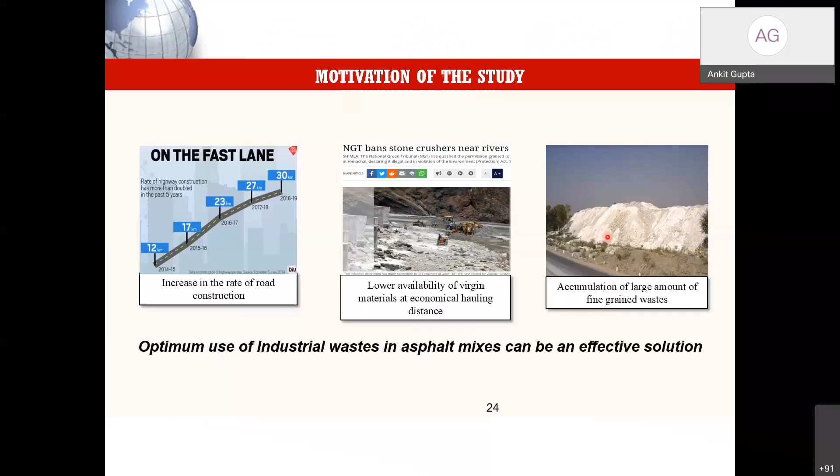To use this in the asphalt mixes. Okay, the bituminous mixes. Again, the similar problems, again coming more in the text form of a problem: India is the second largest road network, and we are increasing at a rate of 12 to 30 kilometers per day.

And a kilometer of highway construction consumes about 15,000 tons of aggregates. Obviously, some number is there, but the use of the aggregates is there. More than 95% of the road network consists of flexible pavements. Still in India, we are using more flexible pavements, probably 90 to 95%. So that's why we are focusing more on the flexible pavements.

Good quality aggregates are again a big issue and becoming a bigger issue day by day. And wherever the quarries are, if they are in a working stage, then they are deteriorating the natural environment of the areas around the quarries and even the human health of the persons who are working there. So we need to use these kinds of alternative materials.

Now, if you see the other side of the coin, the amount of waste which we are generating, the industrial waste which is coming out as solid waste, is approximately 960 million tons. So again, the disposal of this waste becomes a bigger issue. And we are only able to recycle 15 to 20%. Still, we do not have recent data for all these things.

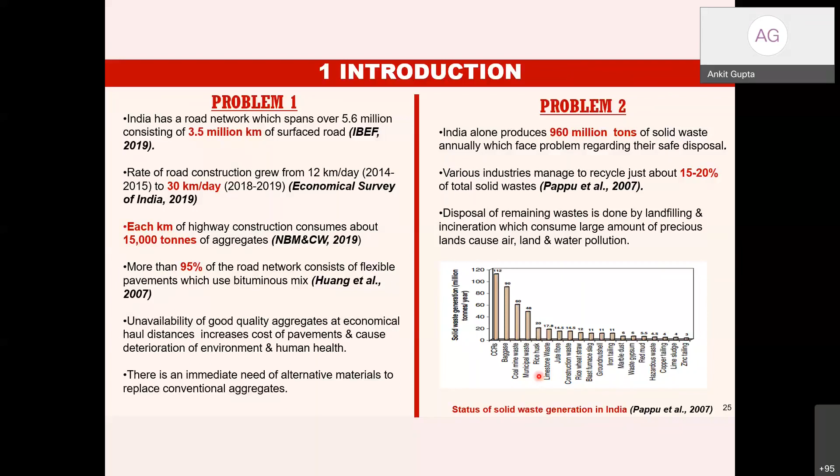If we are not getting this part, then no agency will use all these wastes in construction. And it has been found that many of these waste materials are improving the qualities and improving the service life.

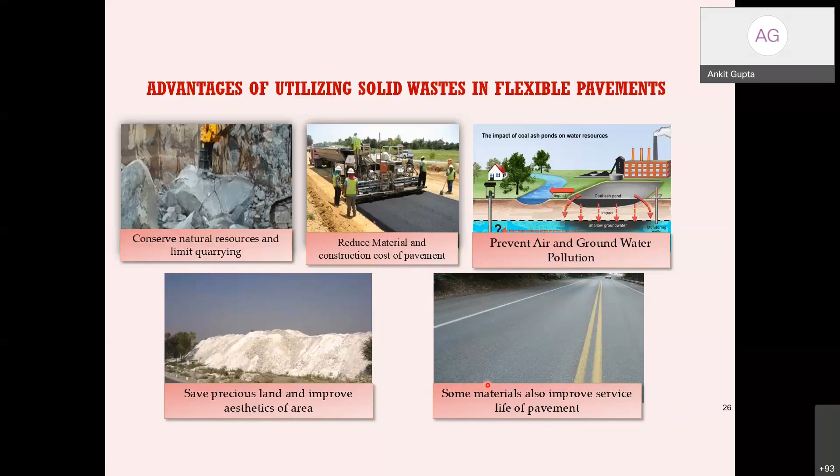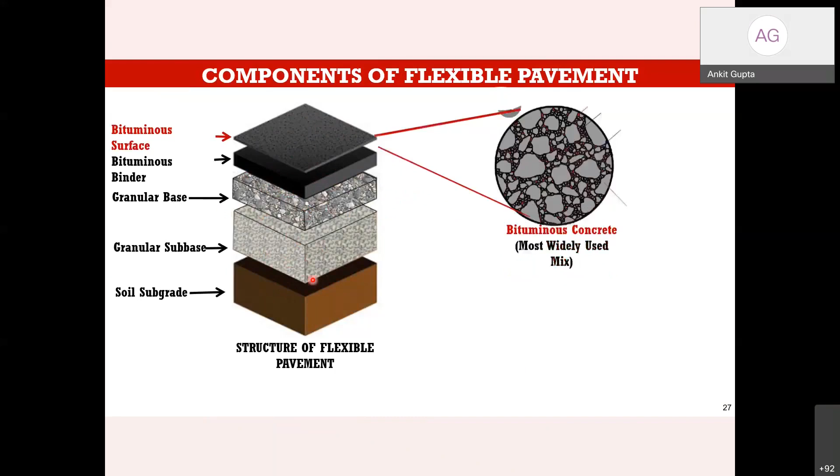Now, for a general idea of what a flexible pavement consists of: there is one bituminous surface, known as the surface course. Then one bituminous mix layer, which is known as the binder course. This is also a bituminous mix. Then a granular base layer, then a sub base layer, and the soil subgrade layer. Now we are only focusing on the bituminous surface.

So this is bituminous concrete, which is a mix of coarse aggregate, fine aggregate, and finer fillers. Finer fillers are the aggregate part which passes through the 75 micron sieve. If you talk about the European specifications, they talk about 63 micron passing. We talk about 75 micron passing. So that is the finer part of the aggregate, the third part.

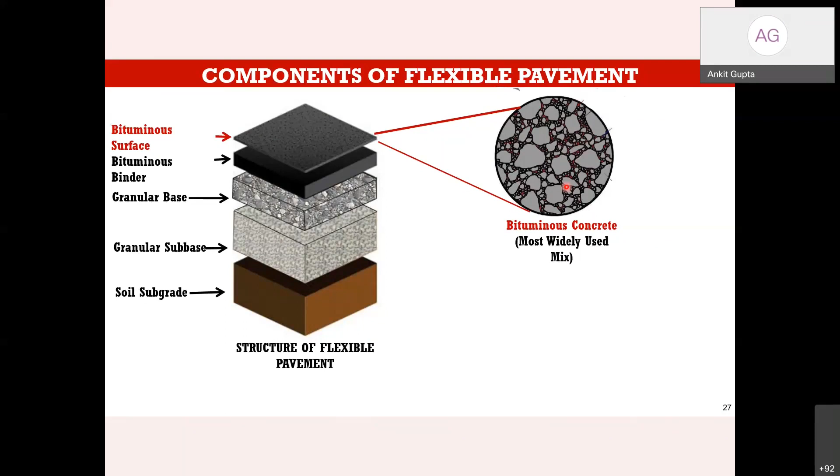And the fourth part of this bituminous concrete is the asphalt or the bitumen. So these are the four things which basically make our bituminous concrete: the coarse aggregate, fine aggregate, filler, and the bitumen. Now this filler serves two purposes.

One is that it fills the voids in the aggregate skeleton which is made by the coarse aggregate and the fine aggregate. So whatever skeleton is made by this coarse aggregate and fine aggregate, the filler fills the finer voids. The other use of the filler is that it mixes with the bitumen.

It mixes with the bitumen and it becomes a thick kind of a mastic, which is used for covering the aggregate surfaces. So the aggregate surfaces which are being covered by a black layer are not only of binder; it is basically a mix of bitumen plus filler, which is known as a bitumen mastic.

But while interacting with this bitumen, this filler should be inert in nature. There should not be any chemical interaction with the bitumen. So this is the ideology behind the use of a filler. If it is chemically interacting with the bitumen, you have to check what kind of chemical interactions are taking place. A few chemical interactions are good for the properties of the bituminous concrete. Some chemical interactions are not. We will see in the coming slides.

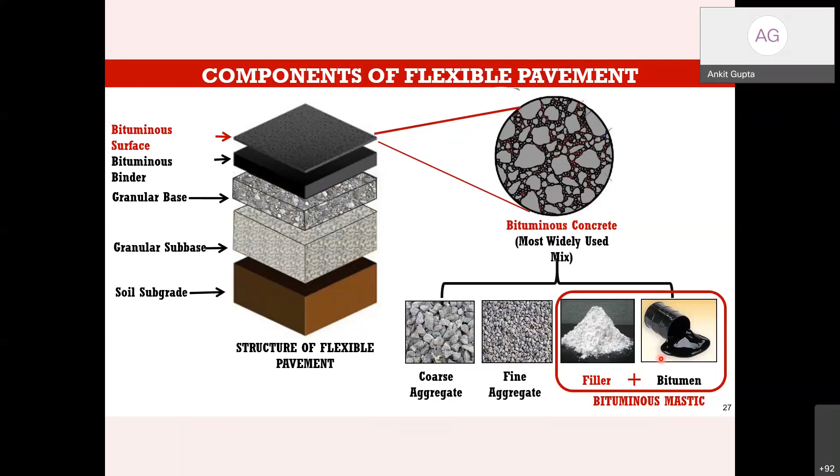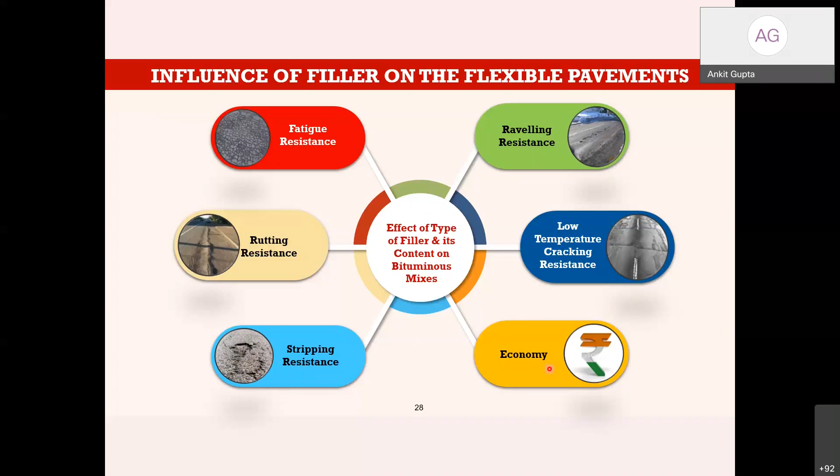Now coming to the mineral filler, those who are not aware of this area can try to understand that the fillers are the finest aggregate, passing through the 75 micron sieve. Our codal provisions, the Ministry of Road Transport and Highways provisions, say that a filler should have two properties to be used for pavement construction. The filler should be free from organic impurities and have a plasticity index not greater than 4. So the first thing is passing through 75 micron. The second thing is PI less than 4.

Obviously, these two properties are not very self-sufficient, which we have found from our research also. We have found that PI less than 4 is not a very good criterion. The filler should be free from organic impurities, but PI less than 4 probably is not a good criterion, and we have our own logic and justifications for why it is not.

But as per the Indian specifications, the filler in a whole asphalt concrete mix consists of something like 4 to 10% by weight. So that is the amount of the filler. So almost 7 to 8% of fillers, if you are directly using some waste kind of a thing, it can save a significant quantity of our economy also.

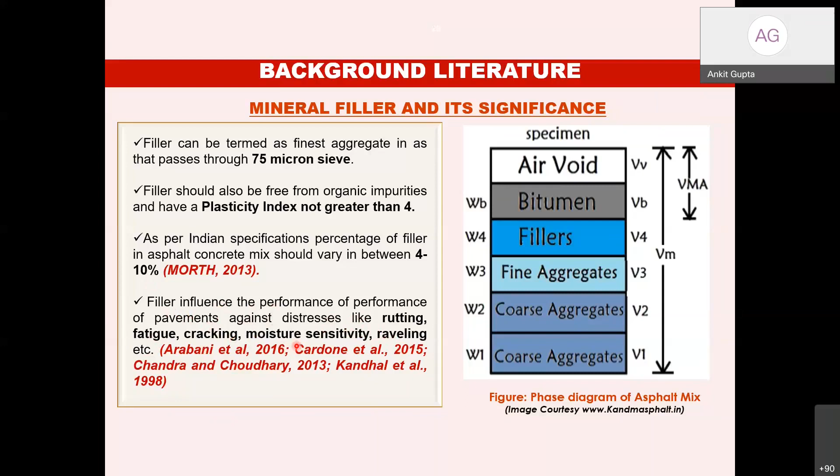Now again, as I discussed, filler has an influence on the performance of pavements against various distresses like rutting, fatigue cracking, moisture sensitivity, raveling, etc. And this has been shown by various researchers. This is only one slide for the literature review. There are so many wastes which have been worked upon in the literature; I could not quantify all in this particular slide, but there are many more.

There are coal fly ash, marble dust, granite dust, rice husk ash, which is an agricultural waste, sugarcane bagasse ash, again an agricultural waste, recycled brick dust, a construction demolition waste, sewage sludge ash, cement kiln dust, coal waste powders, ceramic waste dust, bauxite residue; all such kinds of things have been used.

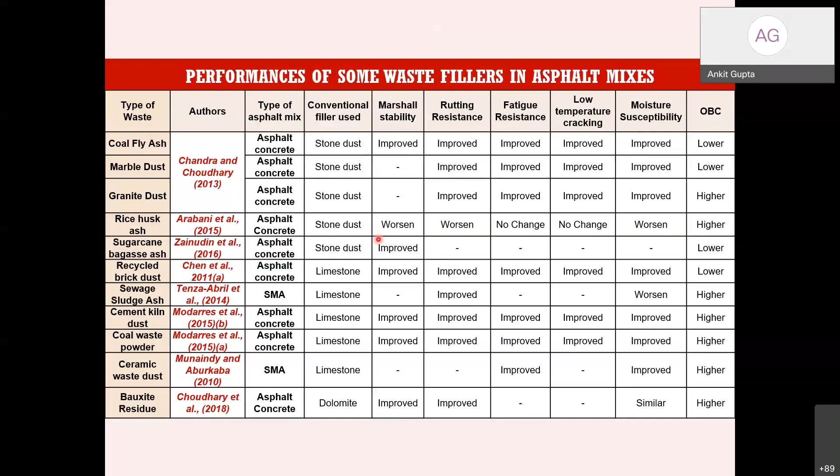And mostly you will see that the use of these waste fillers has improved the properties. Only in certain cases, at one or two places, one or two properties have reduced; it has worsened the properties. Most of the properties have increased.

So this has basically given the primary objectives to work upon: we have used glass powder, limestone dust, copper tailing dust, carbide lime, rice straw ash, red mud, and brick dust, and stone dust was the conventional filler, just to compare the properties.

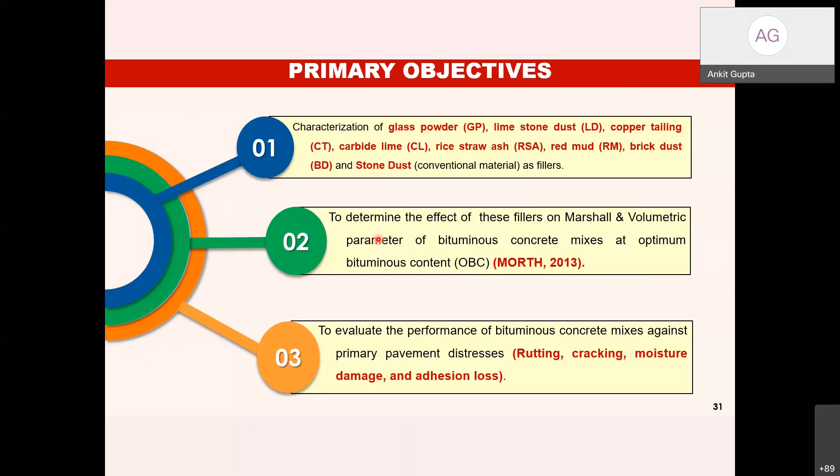Okay. And then we have made our mixes, we have tested our mixes, we have done some engineering analysis, economical analysis, and the global warming potential analysis. That is the environmental analysis we have done. Okay, so this is the methodology we have used.

Okay, the carbide lime is being collected. I'll show you all the sources in the next slide. Okay, but for a filler, we did some characterization. The characterization tests are the particle size distribution, German filler, specific gravity, methylene blue, plasticity index, the microstructural properties, that is the SEM and the XRD, pH and the hydrophilic coefficient.

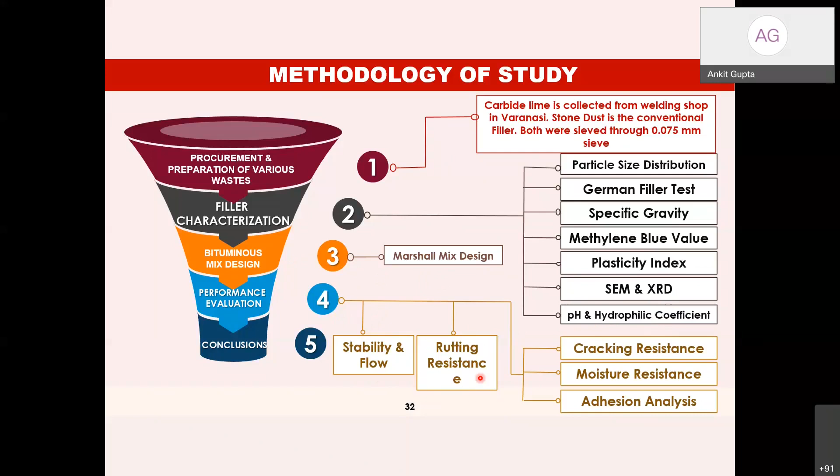Then we did the conventional Marshall mix design, we did the performance evaluation of the mixes by using some indirect tests like the rutting resistance. We used cracking resistance. We did moisture resistance. We did the active adhesion analysis, and then we did some comparative analysis.

Okay. So these are the different fillers which we have studied in our lab. Construction demolition waste we have taken from our city, Varanasi. Limestone dust we have taken from the limestone industries which are situated in the district of Kota, Rajasthan. The glass powder we have taken from Bhopal. The copper tailings from the HCL industries of Malanjkhand.

Then the carbide lime again from Varanasi, from the acetylene industry. If you have heard about the welding wires, okay, the welding industry. So this is the waste which is coming out of a welding industry, the carbide lime. The rice straw ash is the agricultural waste, again taken from Varanasi.

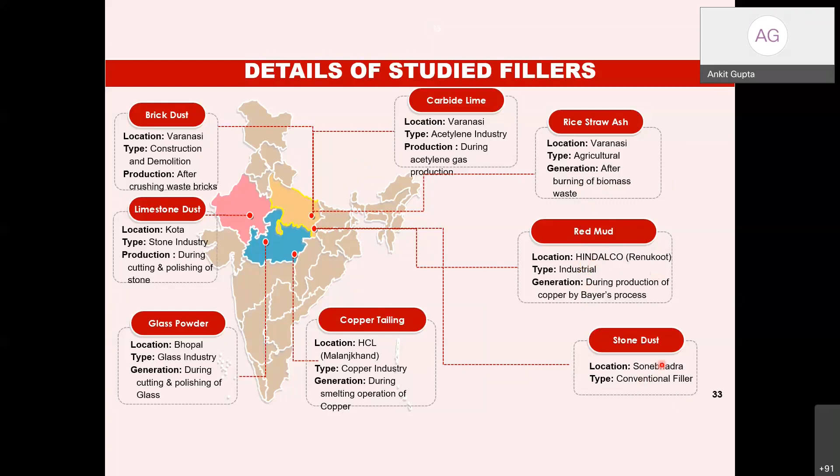The red mud we have taken from Hindalco, that is the aluminum industry near Renukoot. Okay. And the stone dust is a conventional stone dust which we have taken from a local quarry that is in the district of Sonebhadra.

Now coming to a more detailed research methodology, we have done all these characterization tests for the fillers. We did the Marshall mix design. Then we did the testing of our bituminous concrete. Okay. Now the indirect tensile strength for the fatigue cracking, the resilient modulus, the modified Lottman test for the moisture resistance.

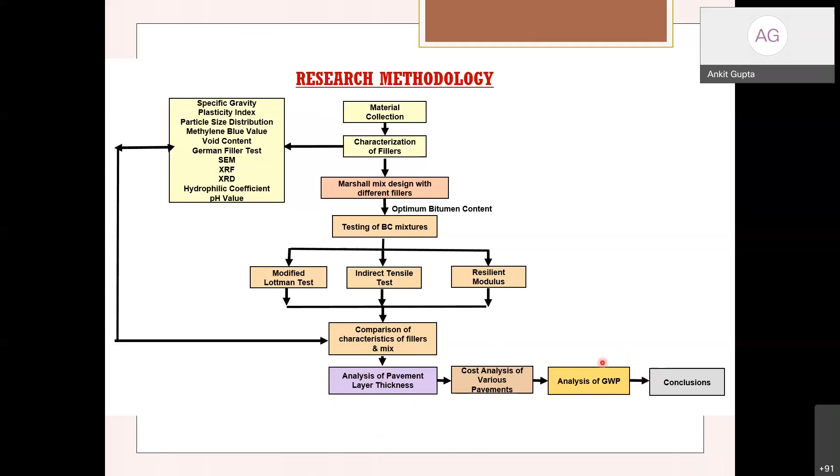And then we did the comparison of the characteristics of the fillers and the mixes for finalizing the pavement layer thickness. So we basically designed the pavement hypothetically by the values, and then we have tried to compare the cost analysis of the various pavements, and then we have tried to analyze the global warming potential also, whether it is really sustainable or not. So that's why we did some global warming potential analysis, also known as the environmental analysis, and we finally come to some conclusions.

Now coming to the first part, that is the characterization of the filler. It has been shown in the previous literature that the fillers having small size particles show some strong chemical interaction with the bitumen, and they normally have high stiffening power also. So you can see the limestone dust, the rice straw ash, and the red mud were found to be among the finest fillers, as shown in the next chart also. The fineness modulus values are the smallest, and the D50 values are also small.

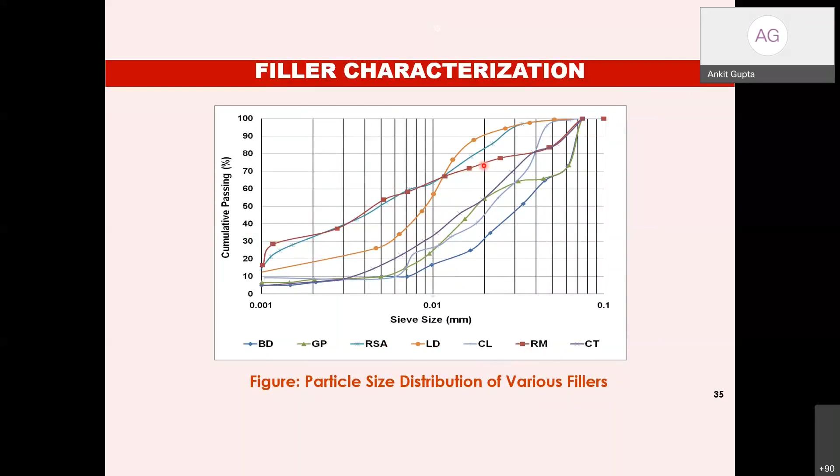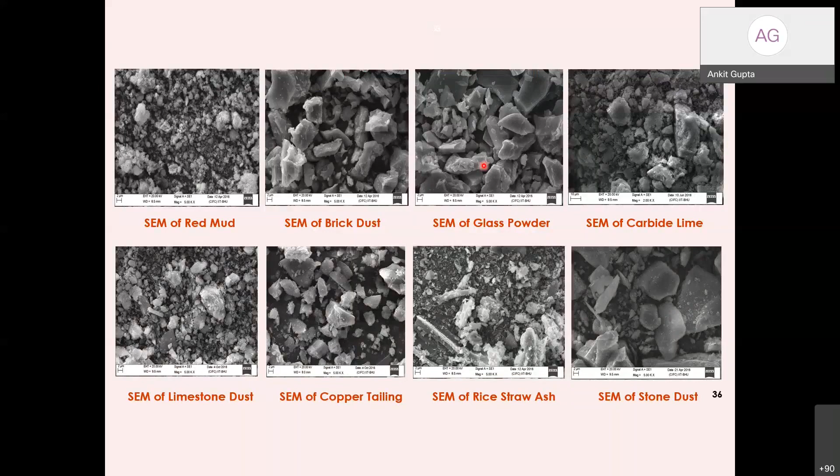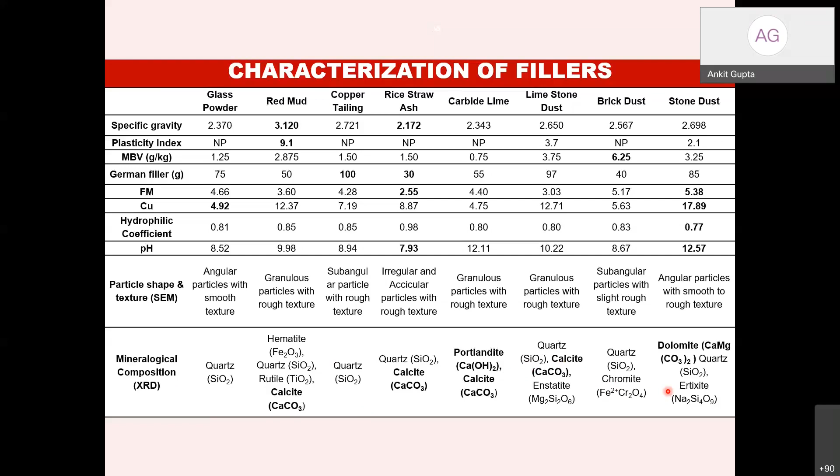Okay, so a higher amount of silica content will lead to failure in the moisture, because if silica is there on the surface of an aggregate, then the bitumen cannot have a strong bond with the silica. Okay, and there will be a repelling action, and in the presence of moisture, the bitumen loses contact with the surface of the aggregate. Okay, and that has been seen in the results also.

This is a very conventional Marshall mix design. Those who are not from the pavement side do not need to worry about it. And those who are from the pavement side must have a good idea of the Marshall mix design. So we did it as per the conventional MS-2 method, the MS-2 codal guidelines. 15 samples were prepared for bitumen content varying from 4.5 to 5 to 5.5, 6 and 6.5. The optimum bitumen content of the mix is defined as the bitumen content which corresponds to 4% air voids.

And at OBC, 3 more mix samples are prepared just to check the statistical or repeatability values for finding out the Marshall stability, flow, VMA, and VFB. We also tried to find out the apparent film thickness, that is, what is the film thickness around the aggregate, with respect to NCHRP reports 567 and 673.

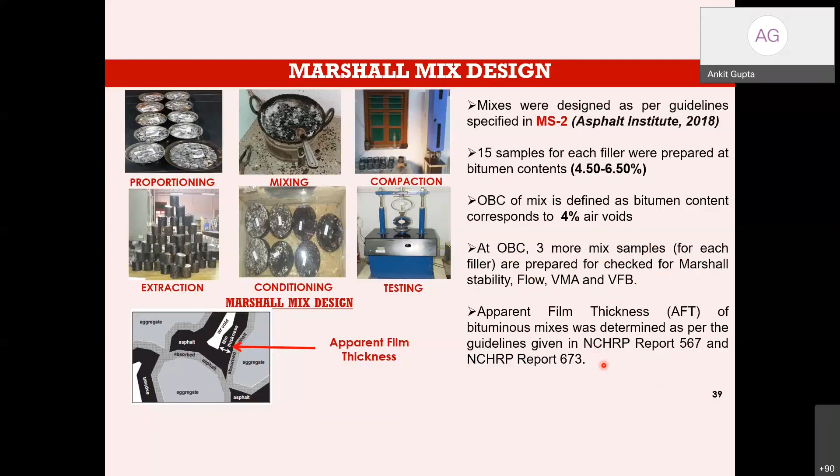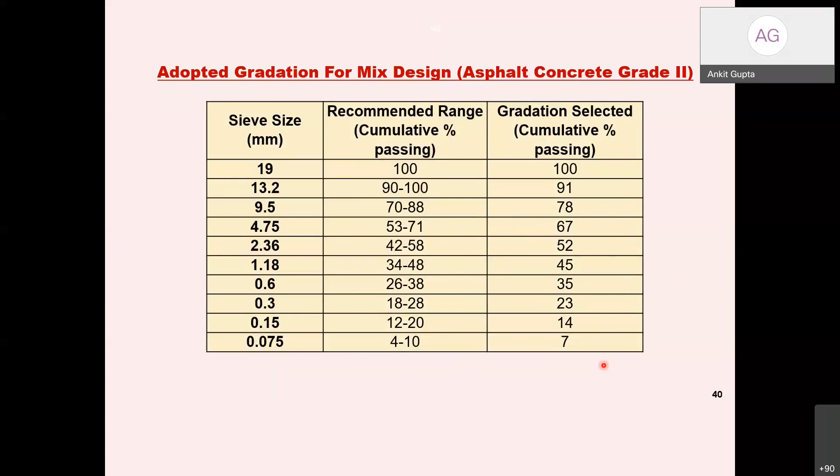This we have used for the asphalt grading, BC grading 2, which has been taken from the Ministry of Road Transport and Highways guidelines, that is the Orange Book. And these are some of the comparisons of the results for the Marshall mix design.

Now you will see that as compared to the stone dust, because this is our comparative value, the limestone dust is even using a lower amount of bitumen content. The OBC is lower than this 5.38, that is 4.98. So we are saving bitumen, and bitumen is the costliest part in our whole pavement materials. If we are saving bitumen, then obviously we will save a lot of cost. So limestone dust is only requiring 5% as compared to 5.38 for conventional stone dust.

The red mud obviously is taking a higher amount of bitumen, but if you see it on a life cycle cost method, then probably the red mud is again viable because you are utilizing the waste. So maybe right now it is a 50-50 kind of thing that we are using red mud. We are getting a somewhat higher OBC, but it can be used.

And if you see the required properties as per the guidelines, most of these fillers are passing those properties. If you see the bulk specific gravity, the values are in a good range of 2.45 or 2.47. So it's a good bulk specific gravity we are getting. The Marshall stability should be 9 minimum. We are getting values more than 9. The minimum for the

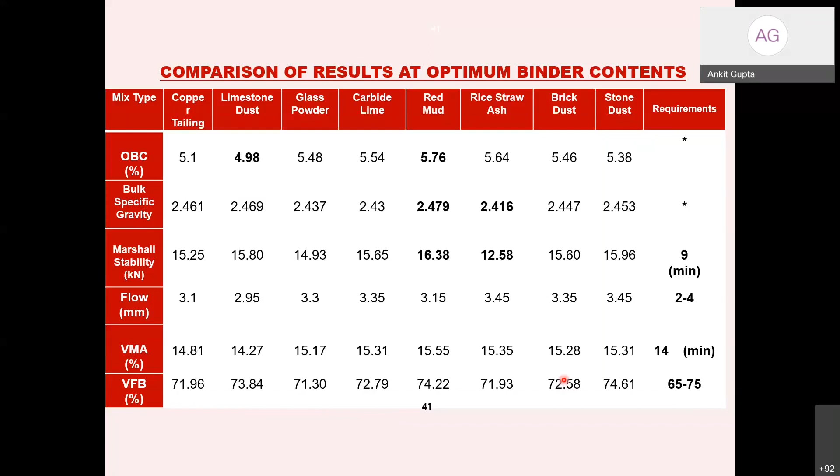This slide can conclude that we can use all these waste fillers in our pavement industry, if you just omit the plasticity index part, which should be less than 4. But for red mud, we are getting a PI value of 9. Except that part, we are doing good with respect to our guidelines. So this is all about the results of using the various wastes in our bituminous mixes.

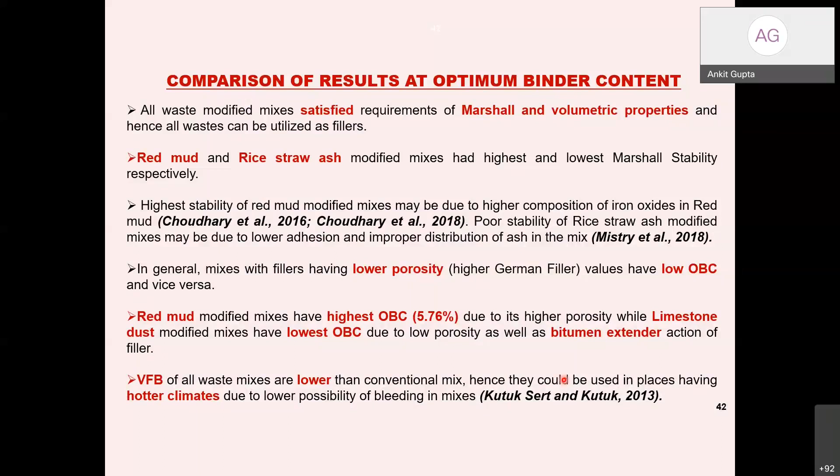My thing is not ending here. This is the comparison we have discussed right now. Now coming to the various kinds of mixes which we have tested. After making the asphalt mixes, we have tried to evaluate their performance from laboratory tests. There are two basic modes of failure of a flexible pavement: one is rutting failure, one is fatigue failure.

For rutting failure, the original method of doing the rutting test is using the Hamburg wheel rut tester, which is one of the sophisticated machines. Right now we do not have this in our lab, but soon we are going to purchase one. So we have done some indirect testing, that is the Marshall quotient, the ratio of the Marshall stability to the flow value, which has been widely done by researchers and widely accepted in the literature.

So we have done this Marshall quotient test, and we found that apart from the rice straw ash, all waste modified mixes have higher rutting resistance than the conventional mixes, which were with stone dust. Now why is the rice straw ash lower? Because it is very fine, it has a lower specific gravity, and it has higher voids in the mineral aggregate. These are the reasons the rice straw ash had a lower value.

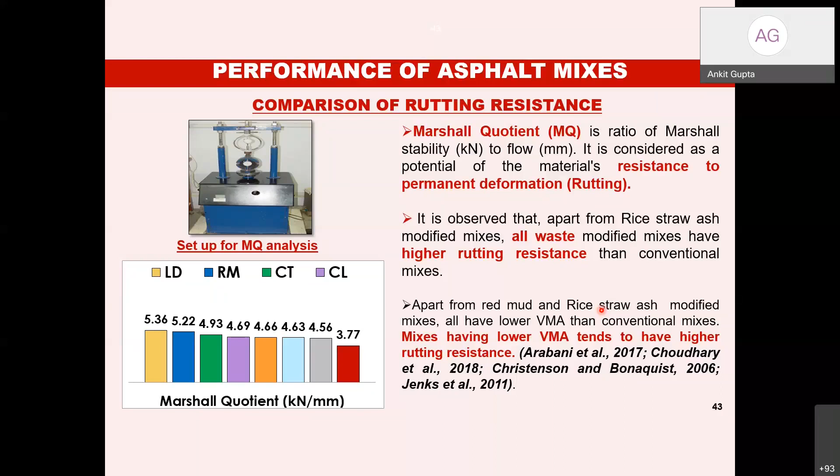Now coming to the cracking resistance part, the fatigue cracking has to be checked by the UTM, the dynamic UTM. But again, we do not have that equipment.

In a month we are expecting the delivery of the UTM in our lab. So we have done some indirect testing using indirect tensile strength, as per the ASTM codes given in the D6931 specifications.

Now you will see the results. Apart from the brick dust and the rice straw ash, all the mixes are having higher ITS values. Only for the construction demolition waste and the rice straw ash, which is showing some inferior properties as compared to the conventional stone dust.

I am still not telling that the rice straw ash modified mixes are bad. Only thing, they are not able to perform as per the conventional mixes prepared with stone dust. All fillers are finer than the stone dust, as determined from their lower fineness modulus values.

The finer fillers, as I told earlier, have a greater potential for uniform distribution, which leads to formation of a good, compact structure that improves the stiffness and ITS of the mixes. Most of the fillers are showing superior properties for cracking resistance also.

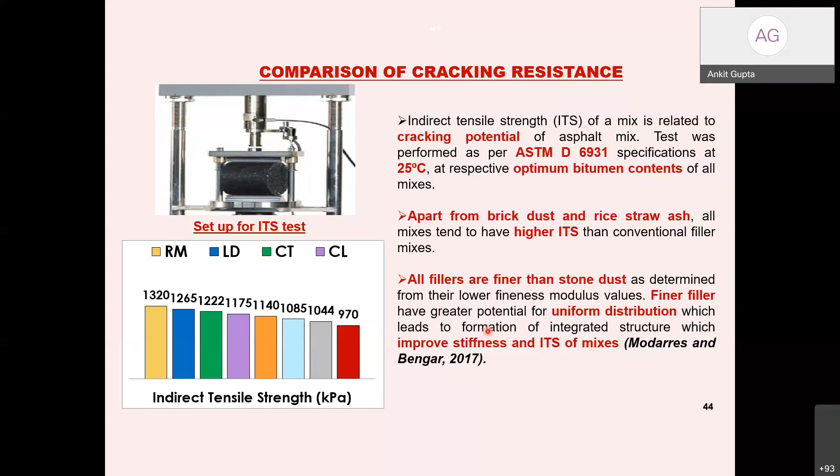Now coming to the next test, the moisture susceptibility, done as a tensile strength ratio, that is the TSR test as per the AASHTO T283 specifications. There is a fixed value that the minimum requirement for this TSR value should be 80%, as given in the Indian guidelines.

Now the carbide lime modified mixes are having the highest TSR value. It is more than 80% for all values, like 80.47, 81, 84, 86, 87, 89, 93.

Only for one mix the value is lower than 80%, and that is the glass powder mix. The glass powder mixes are failing in moisture, as I discussed in the previous slides, because of the predominance of silica. Silica is responsible for the failure in moisture, making a weak bond with the bitumen which breaks in the presence of moisture.

Except for glass powder, all these fillers give good, satisfactory results with respect to moisture susceptibility also. We did some experiments with glass powder on how we can avoid discarding it just because it fails one result. So we did some modification of the glass powder, creating composite fillers by mixing some percent of carbide lime into the glass powder dust.

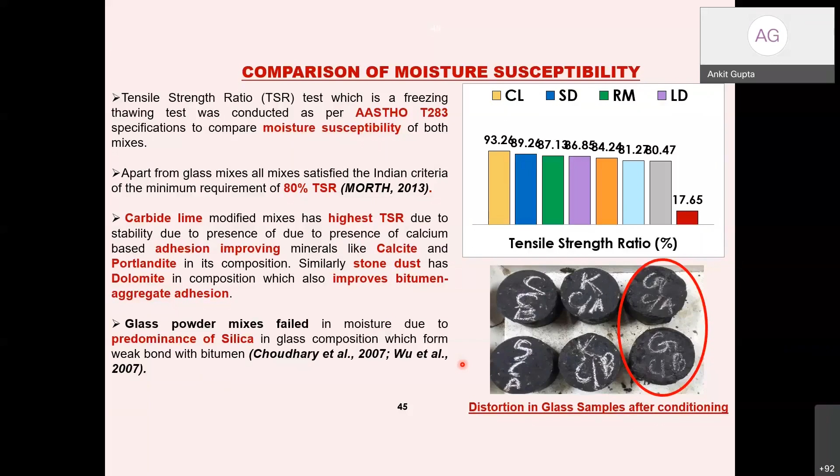So still, in most things, the glass powder gives satisfactory results, but only for the moisture part it is failing. Now comparing with the active adhesion part: active adhesion is the ability of the bitumen to completely coat the aggregate during the mixing operation. When we mix the aggregate with bitumen, we measure how fast it coats the whole aggregate with bitumen, that is the time of coating.

This is a visual kind of test, which we do in the lab. The measurement of total time elapsed was measured between the moment of addition of the bitumen and the moment at which 100% coating is achieved.

You will see that the stone dust had the least mixing time, and for the glass powder, the mixing time was highest. The rest of the times are not comparable, because more mixing time has implications on carbon emissions, leading to more use of fuel and more emissions of gases.

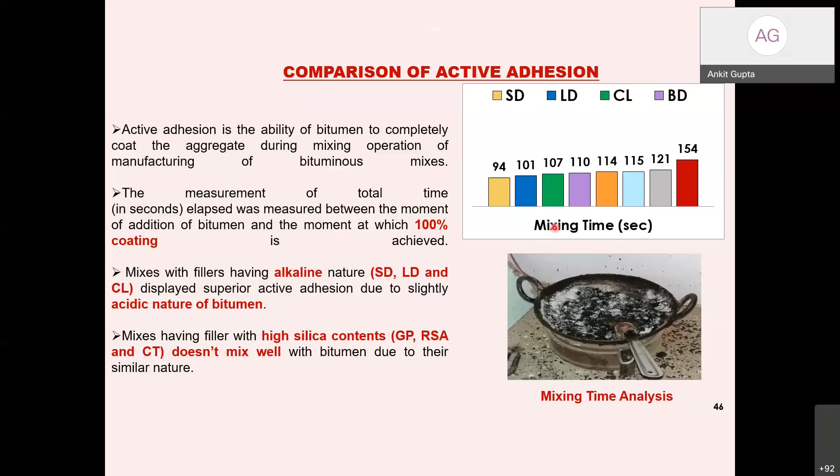Hello. Ankit sir. Ankit, Sanchit. Yes sir, I think he has lost the connection. Am I connected now? Yes sir, we can listen to it now. I'm not sure where I left off. Have I completed the active adhesion part? Yes sir, you were disconnected for just a minute or half a minute. Okay, so I apologize for all this technical hiccups.

Continuing with this, I think I'm only left with 3-4 more slides. So the passive adhesion we tested with the Texas boiling water test, and it was done. It is just the reverse of the active adhesion part, where we put the bitumen coated aggregates in boiling water, and then we see how much time it takes or how much the coating is taken out from the boiling water. So how much of the aggregates remain coated - that is what we find out with the passive adhesion.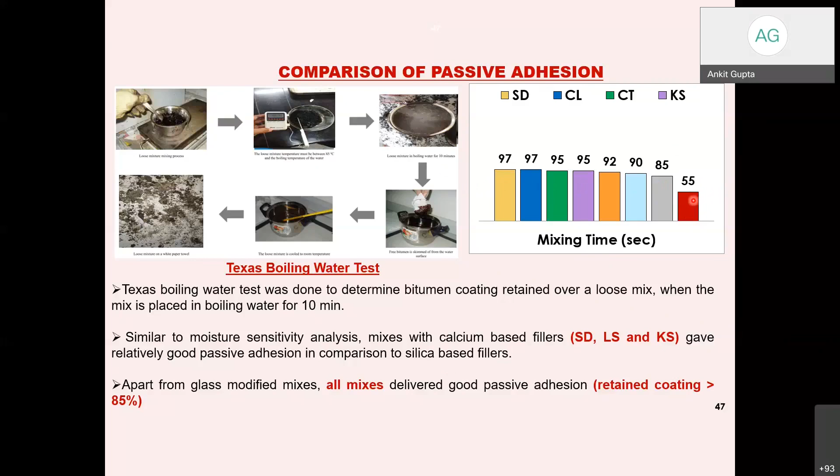Again you'll see that as compared to the stone dust, almost every value is similar. Only the problem is with the glass powder. The retained coating should be more than 85%, and this was shown by most of the fillers. Now all these values are shown with respect to various parameters.

The histograms show the indirect tensile strength and the resilient modulus. These resilient modulus values we tried to find out not from our lab, but from the lab at IIT Kharagpur, and we found this is the stone dust. You will see that the resilient modulus of all the waste modified mixes are of a comparable nature. Only for the rice straw ash, the resilient modulus is very less as compared to the conventional stone dust. The rest are all in a similar range.

Now with respect to the indirect tensile strength, that is for the fatigue resistance, again the values of the stone dust and the rest of the waste modified mixes are of comparable ranges, and again only the rice straw ash has the problem of having a lower value.

Now we have tried to find out the reasons why this is happening. There are some primary reasons - the fineness of the fillers was found to be the most influential factor for the cracking resistance of the asphalt mix. For the resilient modulus, again the fineness of the fillers as well as the voids in the mineral aggregates are the influential factors on the resilient modulus of the asphalt mixes.

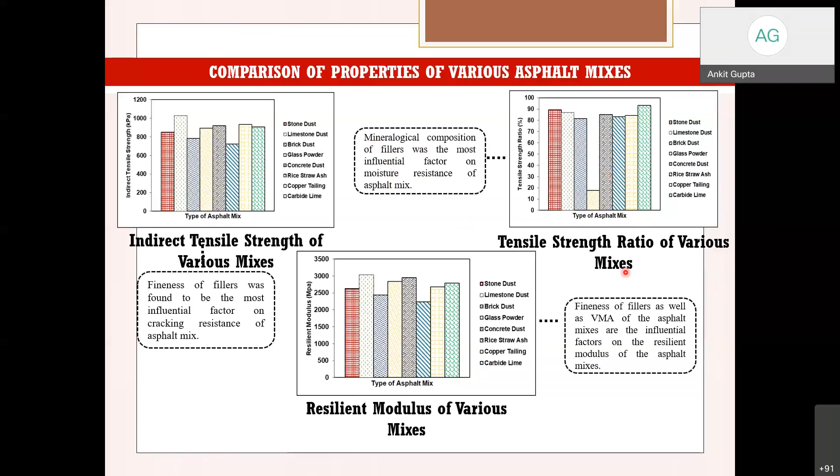Now, with some hypothetical example, we designed a flexible pavement as per the current guideline, that is the IRC 37/2018. We know that the design of pavements as per the IRC 37 is based on the mechanistic empirical approach, the ME approach, which considers two types of distresses - one is fatigue cracking and one is rutting cracking.

So for the fatigue and the rutting, the two distress models are already mentioned in the IRC 37, which have been developed by very old research schemes. We still feel that these models need to be updated. But not going into that side, we are only using the models which have been there in the IRC 37.

Now we know that rutting basically occurs at the top of the subgrade. So the vertical compressive strain is the major parameter which we need to check at the top of the soil subgrade, and it should be lower than the allowable vertical compressive strain. So this is one basic fundamental.

The other fundamental is that for fatigue cracking, at the lowermost layer of the bituminous layer we have to measure this, and the horizontal tensile strain should be lower than the allowable horizontal tensile strain to prevent fatigue cracking. So these are the two basic principles for the design of a pavement as per the IRC 37.

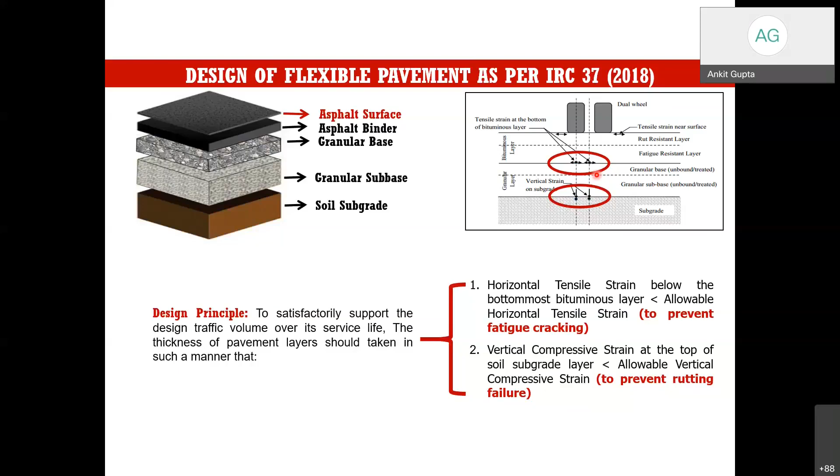Okay, so what we have done is we have assumed 1 kilometer of pavement for a 4-lane pavement, and we have taken the values of the traffic and other parameters from one of the already given examples in the IRC 37.

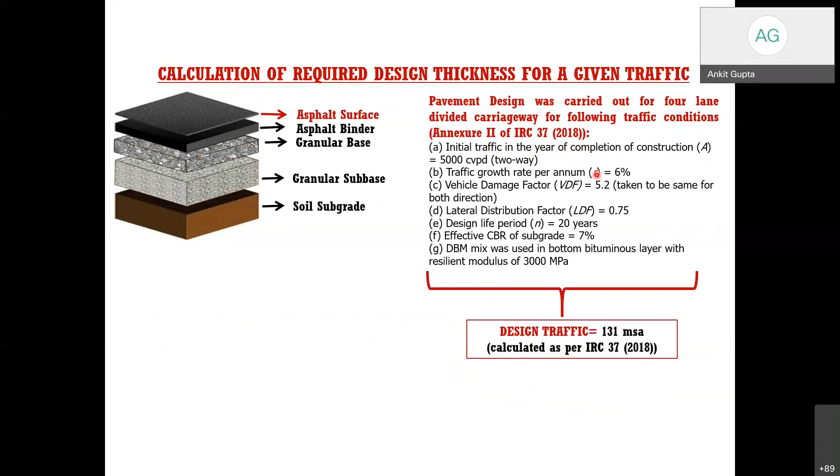We have taken all these values: initial traffic 5,000 CVPD, two-way traffic growth rate 6%, vehicle damage factor 5.2, and the lateral distribution factor. All this is from the solved example in IRC 37.

We have taken these values from that particular example, and now we have designed the traffic as per these values, and we find that the design traffic is 131 million standard axles.

Now for the given distress models, that is the rutting and fatigue models, we find out the horizontal tensile strain at the bottom of the bottommost bituminous layer is 0.15, or 150 micron, and the vertical compressive strain at the top of the subgrade layer was 301 micron. So these are the values which we have found out.

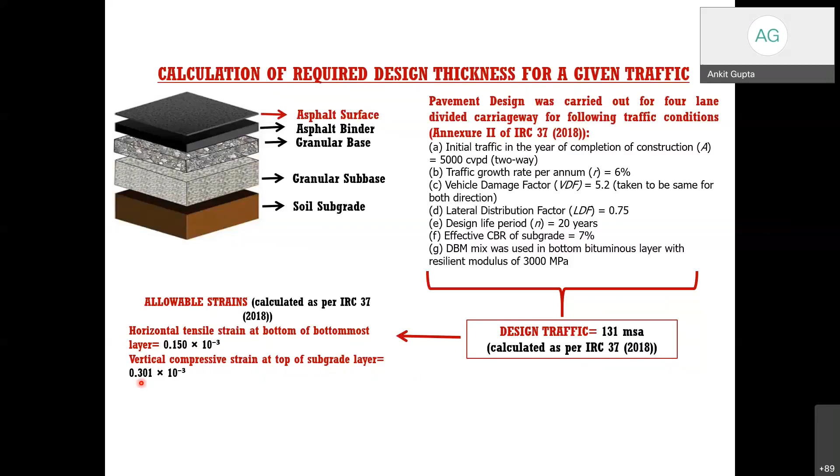We did the analysis using the IIT Pave software. Before going on to the analysis, for the binder surface, that is the asphalt binder surface, the DBM layer, we fixed the thickness of the DBM layer as 150 mm. We have fixed the thickness of the granular base and the sub base as 480 mm.

We have assumed the Poisson's ratio and the elastic modulus for all these values. Now only for the surface layer, that is the surface course, the resilient modulus, whatever values we got from our laboratory experiments, we have used those elastic modulus values.

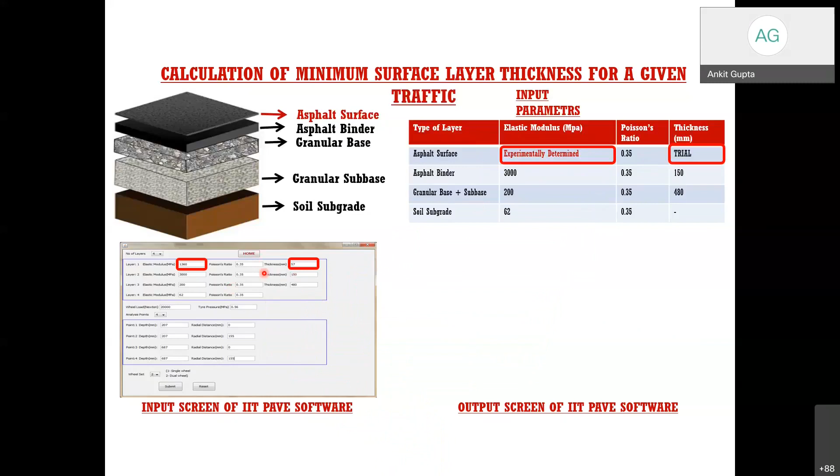And with respect to that, we have given different trial thicknesses for the different waste modified mixes. So we could design our pavements with the different values of layer thicknesses.

So this is what we have found out, the thickness of the surface course, considering the binder course, the base and sub base course, and the subgrade as constant. We have not touched the thickness or properties of those layers.

Only the surface course properties, which were evaluated in the laboratories, were used for the analysis, and we could find that there are some changes in the thicknesses, like the minimum thickness was around 44 mm to the maximum thickness of 49 mm.

Now these are a few different values of the optimum asphalt content, or the optimum bitumen content, which we measured from our Marshall mix design. These are the quantities of the binder.

These are the CPWD rates which we have taken from the CPWD manual, and this is how we could find out the quantity of the binder, coarse aggregate, fine aggregate, and stone dust. Here, obviously, because we are using all these wastes, they are free of cost.

One good thing we have done in this experiment is we have taken the waste directly from the source without any treatment. So there is no treatment done except the sieving, which we have done, like for the 75 micron. And this is the quantity of the waste filler which we have used.

So now we can find out the total material cost. This is an approximate cost for the processing of the material, although we have not done any kind of processing except the sieving of the waste. Still, we have added 0.5% of the material cost for the processing of this waste.

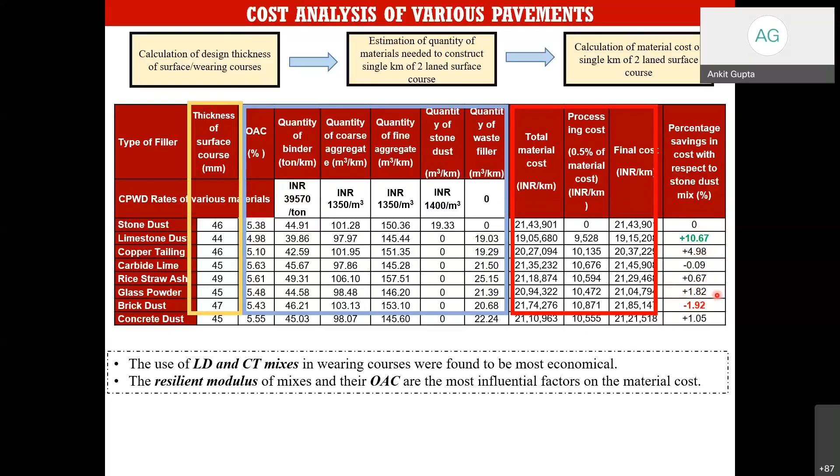And we could find the final values of the waste modified mixes for the asphalt surface course only. With respect to our conventional stone dust, we could find that using limestone dust saves almost 10.5% of the economy, almost 5% for copper tailing, almost equal for carbide lime, almost equal for rice straw ash, glass powder saves almost 2%, and brick dust is not saving in terms of economy, we are losing 2%.

And concrete dust, we are getting 1% saving. So this is just a minor saving with all these waste, but a significant saving with the limestone dust and the copper tailing. Okay. So the use of the limestone and the copper tailing mixes in the wearing course were found to be the most economical and the resilient, because most of the things depends upon the resilient modulus. Okay, because that defines the thickness of a layer.

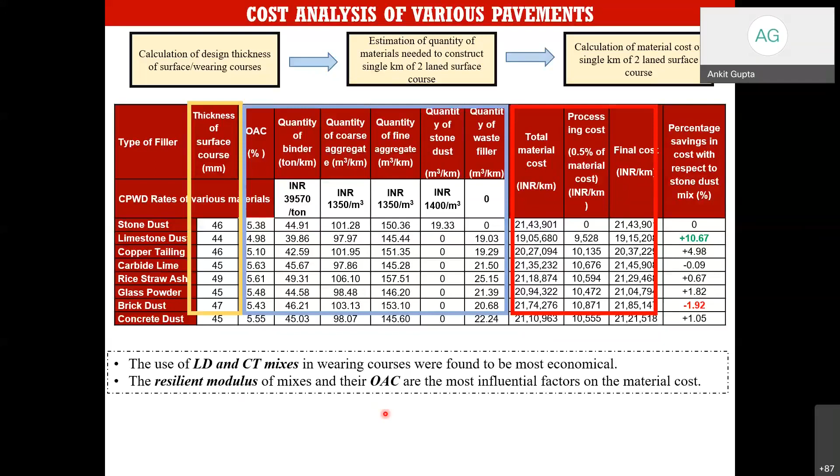Okay, so the higher the resilient modulus, lower will be the thickness of the layer, and the optimum asphalt content, because again asphalt is the major cost of the material out of all the materials of the binder and the aggregate. So these are the two most influential factors on the material cost.

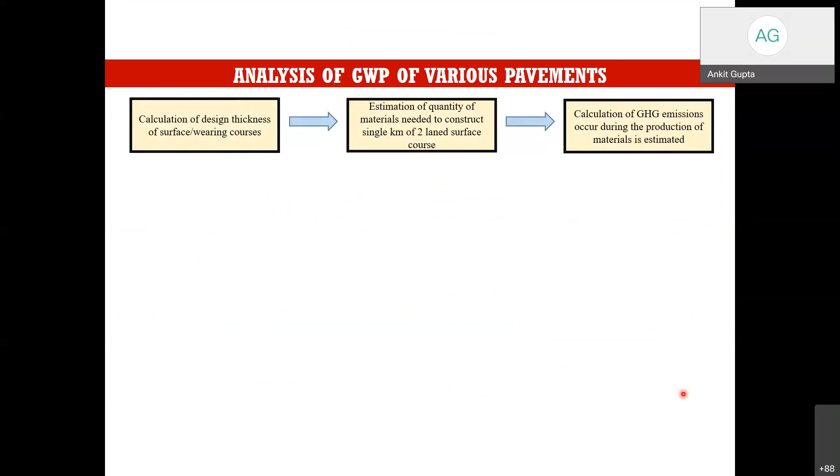Now we have tried to do the global warming potential of the various pavements, like various waste modified pavements. Okay, so we have done the calculation for the design thickness of the surface and the wearing courses. We have estimated the quantity of the materials which is needed to construct a single kilometer 2-lane surface. And then we have tried to find out the calculation of the GHG emission, which is occurring during the production of the materials.

Now, I want to clarify that we have done this analysis only for the production stage. So we have not taken into account the operation stage, not even the construction stage, because construction stage requires the machineries. So that data we were not having. So that's why the construction stage we have not taken in consideration.

Only the production of this material, production of the asphalt mixture. So only that stage has been considered, neither the construction stage, neither the operation stage, and neither the maintenance stage. So these three stages of the global warming potential have not been considered. So now these are the kg CO2 equivalent of the coarse aggregate, fine aggregate, and from the virgin aggregates. So these values have been taken from the European literatures.

Okay, this is the bitumen equivalent of the carbon dioxide, which is again taken from the European literature, because we do not have these values till now as standard values given in any of the codal provisions. Now with the different kind of the waste like stone dust, limestone dust, copper tailing, rice straw ash, glass powder, brick dust, concrete dust, carbide lime, we have done this analysis. Like if we use the coarse aggregate, what is the global warming potential of the coarse aggregate, fine aggregate, stone dust, or any of the waste if we are using.

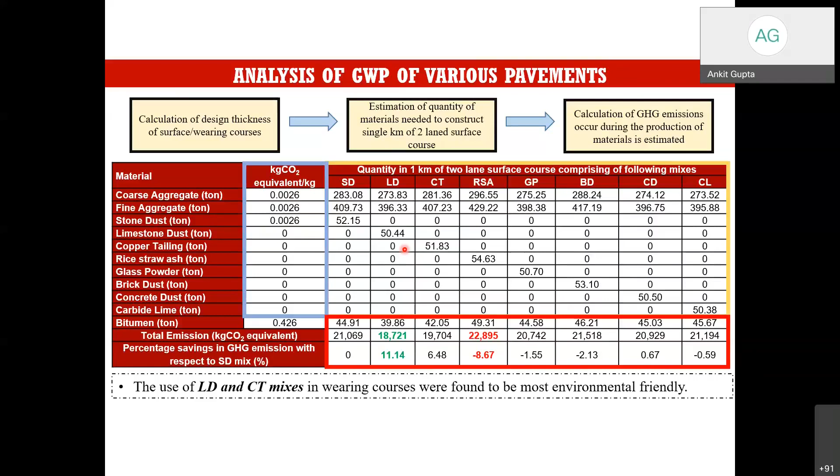So the different data we are still collecting to do some kind of LCA analysis, which can give you a better picture of the environmental potential. So the conclusions of the second part are that all these waste fillers which we have used are at least good as per the Indian paving specifications. They satisfy all the design criteria laid down by the Indian specifications.

Normally, the fillers having higher porosity produce mixes with higher bitumen content. If higher porosity is there, which is normally the case with rice straw ash and the finer fillers, they use higher bitumen, which is not a good sign in terms of cost economics. In general, the finer fillers produce mixes with higher stiffness and cracking resistance. So the finer the filler, the more compact our structure.

In general, mixes prepared with calcium-based, water-insoluble mineral fillers have superior resistance in all the performances. So calcium-based fillers are good compared to silica-based fillers. Glass powder modified mixes are very poor in moisture sensitivity and active and passive adhesion. It can be used where water is not a problem, maybe arid regions, desert areas where there is no water. So this has certain implications in the field.

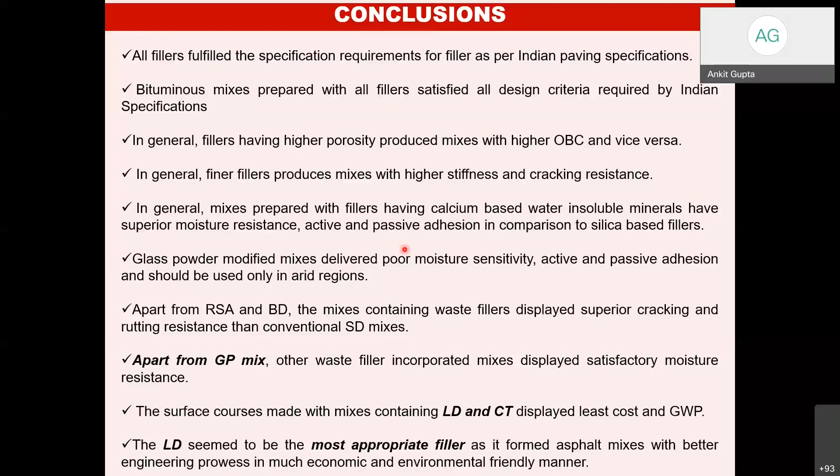Limestone dust seems to be the most appropriate filler because it has a high calcium content. It is a finer filler, so we get a more compact structure, and it forms asphalt mixes with better engineering properties in a more economic and environmentally friendly manner. Now, this is again one of my favorite slides, opportunities. So still, whatever limited experiments we have done,

we get the result, and then we say that this is coming higher, this is coming lower. Sometimes we try to understand the interaction, sometimes not. If we try to understand the interaction, we can give a hypothesis that this is happening because of this. But how to prove our hypothesis? Maybe more chemical interaction analysis or more microscopic analysis is required. So that is still a wide area open in waste research, where all researchers can explore the interaction.

Similarly, if you go through the literature, you will see many fundamental research studies coming out, especially on the micromechanical characteristics of these fillers: how these mastics affect mix performance, how they interact on a micro and mechanical scale with the aggregates, and how they interact when loads come on them. These need to be done more on fundamental, science-based aspects. So that is again one area where we all can work.

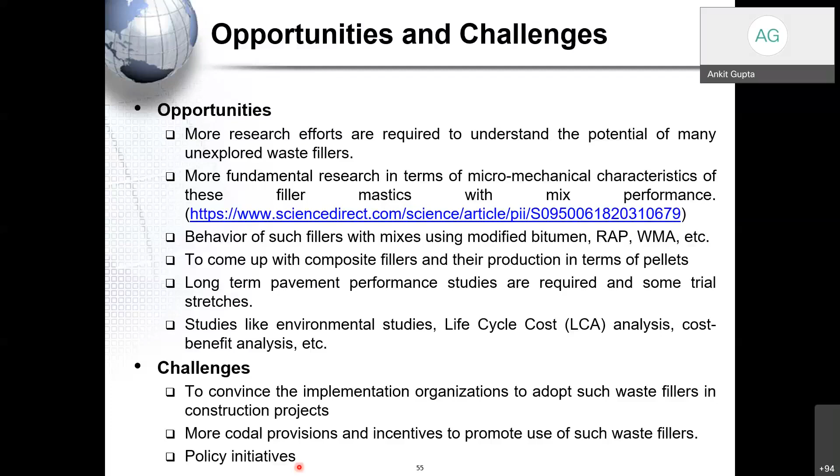Policy should be sustainable. I always say many times our policy is dependent upon the government. As the government changes or as the person changes, the policy changes. So the policy needs to be more sustainable to bring more sustainability in our infrastructure sector. So we can start thinking and working together for making the roads or the infrastructures green, the surrounding environment greener, and the country greenest.

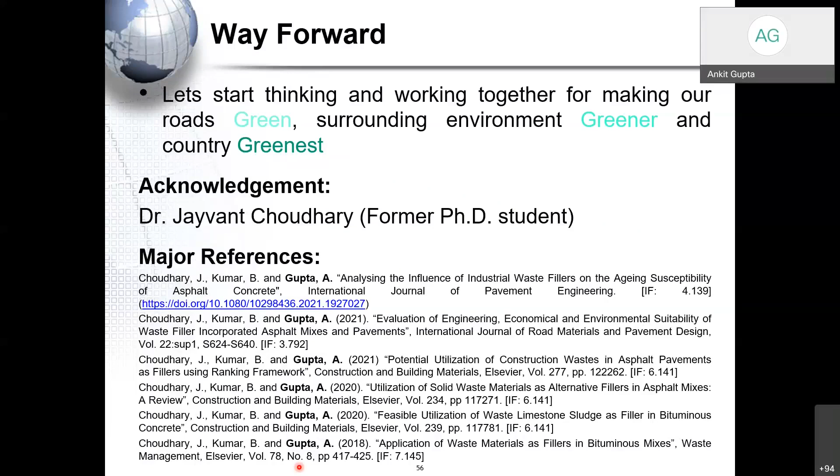The second part was the PhD work of my student, Dr. Jayvant. These are some of our references which we have published out of these works, and there are some more references which I have used, apart from these publications. So with this, I'm ending this long presentation.